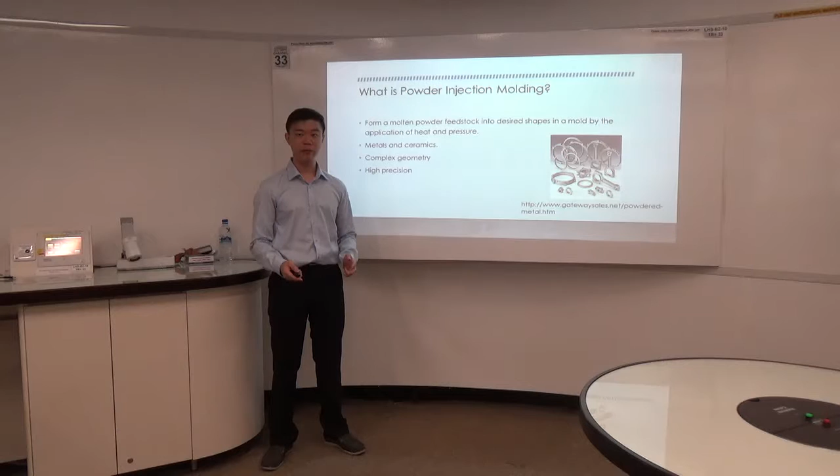My name is Kang, and my topic today is polymeric binder for transparent ceramic powder injection molding. Now, what is powder injection molding? It is actually the process in which we form a molten powder feedstock into the desired shape inside the mold via the application of heat and pressure. This technology is compatible with ceramic and metal powder, and it is widely considered an effective way of forming parts with complex geometry with high precision.

Now, there are 4 steps for powder injection molding, which are mixing, molding, debinding, and sintering. The first step here is mixing. It is actually the process in which we mix the transparent ceramic or metal powder together with the polymeric binder in order to achieve a feedstock. To make sure this feedstock is homogeneous, a twin screw extruder or a planetary mixer will be used.

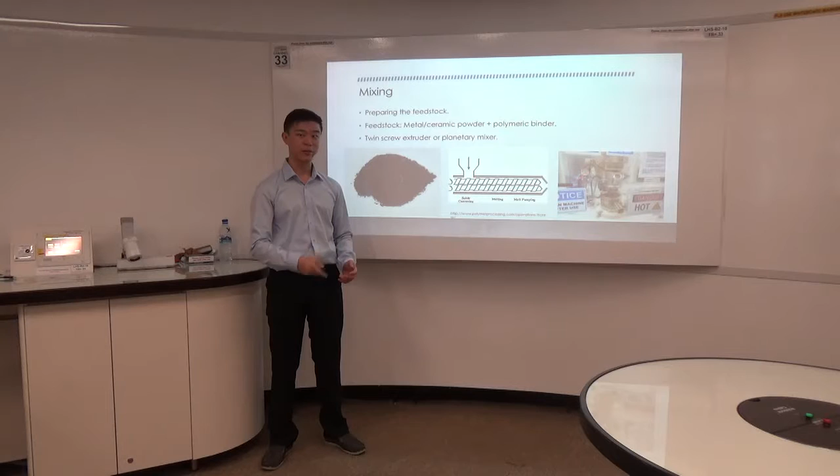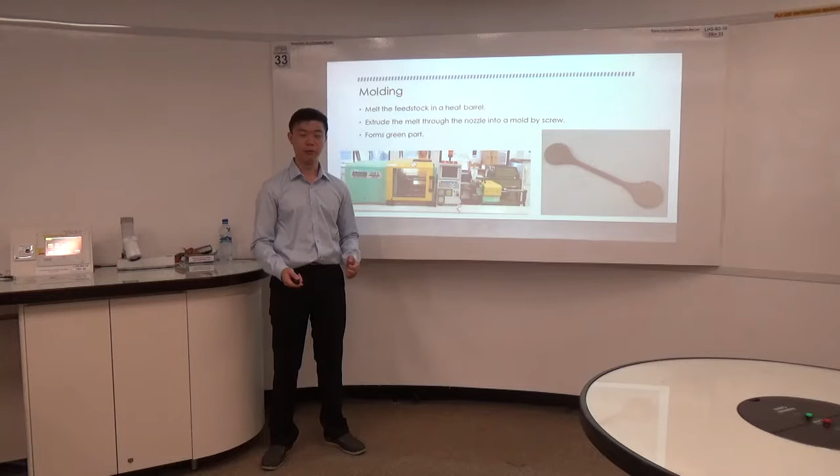The second step here is molding. During this step, the feedstock will be poured inside the heated barrel, and after it melts, the screw inside the heated barrel would spin and generate enough pressure to force the molten feedstock out of the nozzle into the mold. When the mold opens, we will acquire the green part.

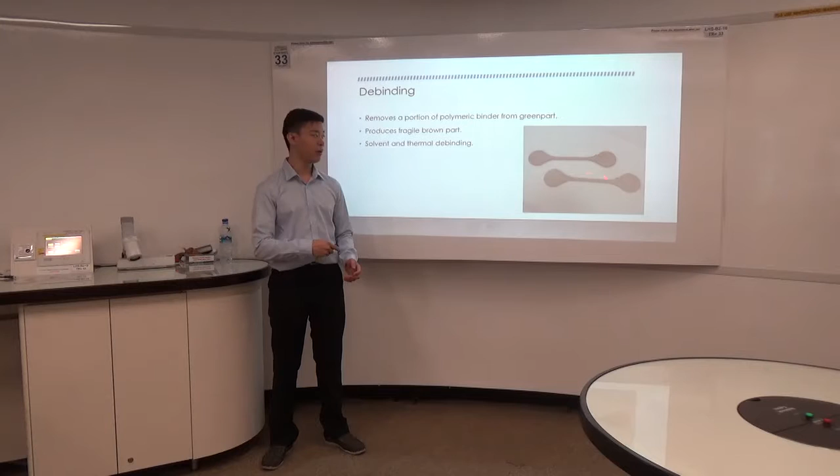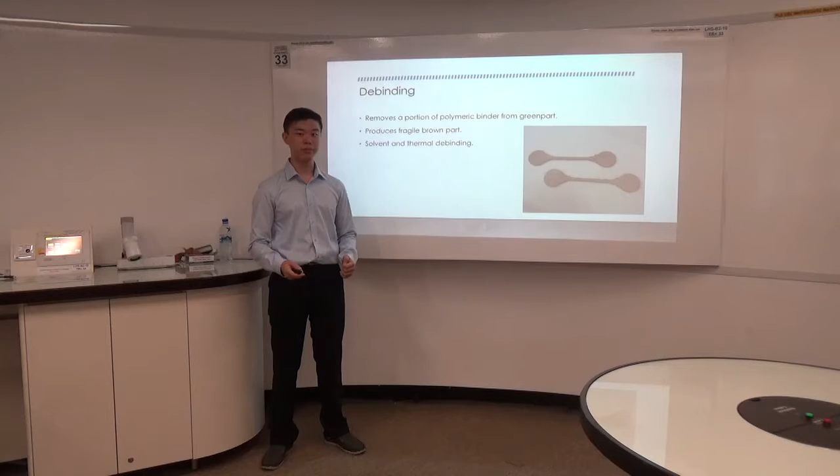The third step here is debinding. This is the step in which we remove a portion of the polymeric binder from the green part and form the brown part. Since some of the polymeric binder has been removed, this brown part is very fragile and must be handled with care. There are 2 types of debinding process, which are solvent debinding and thermal debinding. Which of these processes will be used depends on the composition of the polymeric binder.

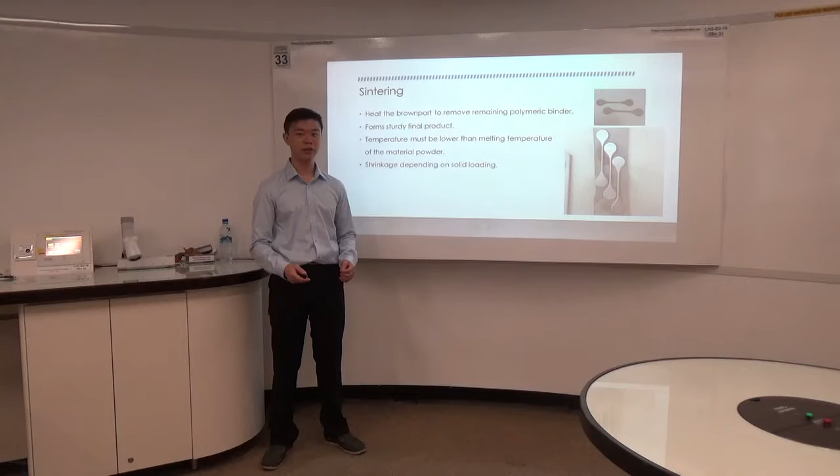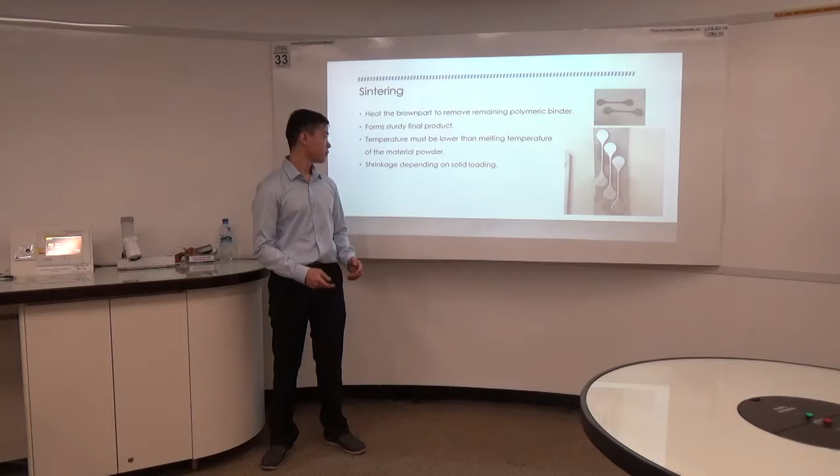The final step here is sintering. During this step, the brown part will be heated at a very high temperature in order to burn away all of the remaining polymeric binder to acquire a sturdy final product. This final product is very sturdy compared to the brown part. Although this temperature is very high, it is always lower than the melting temperature of the material powder. Since all of the polymeric binder has been removed, this final product is actually smaller than the green part, and the degree of shrinkage depends on the solid loading.

Now, what is a polymeric binder system? It is actually a mixture of a lot of polymers. In the solid state, it can stick and hold the material powder together, and in the molten state, it can carry the powder around and act as a lubricant. The composition of the polymeric binder directly affects the viscosity and strength. The components of the polymeric binder system can be divided into primary binder, backbone polymer, and coupling agent.

Depending on what kind of primary binder we use, the polymeric binder system can be divided into 2, which are wax-based binder system and catalytic-based binder system. Generally, the wax-based binder system will have a lower viscosity and mechanical strength compared to the catalytic-based binder system.

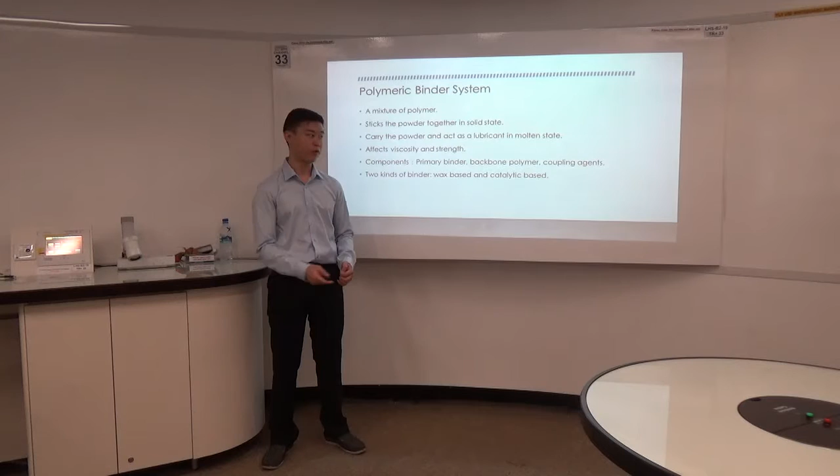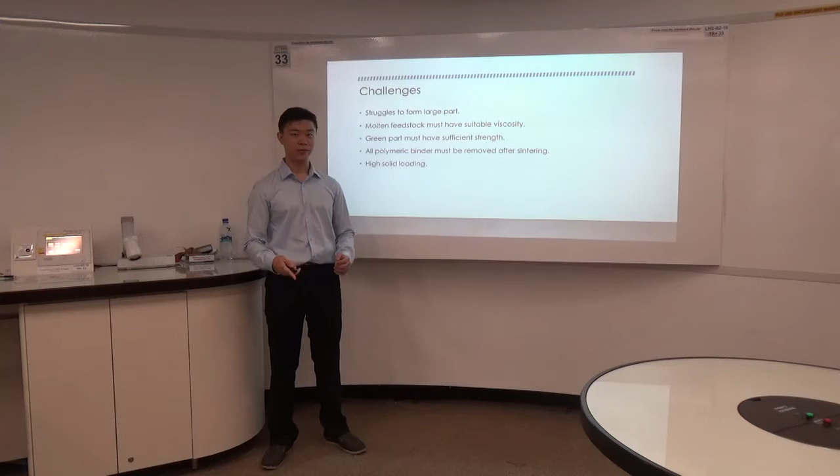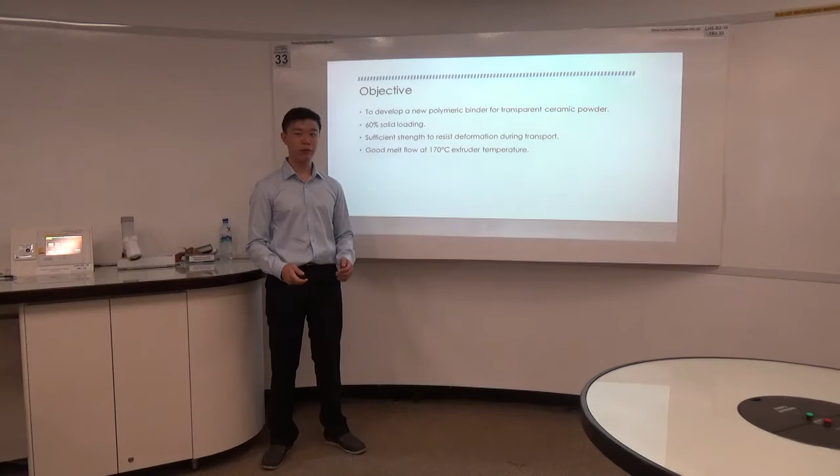Now, the objective for this project is to develop a new polymeric binder for transparent ceramic powder, and the solid loading must be 60% when it is mixed with alumina powder. This feedstock must have sufficient strength to resist deformation during transport, and it must have a good melt flow at 170° extruder temperature. The feedstock must be compatible with a wide mold temperature range, and it must have 0 residue binder after sintering.

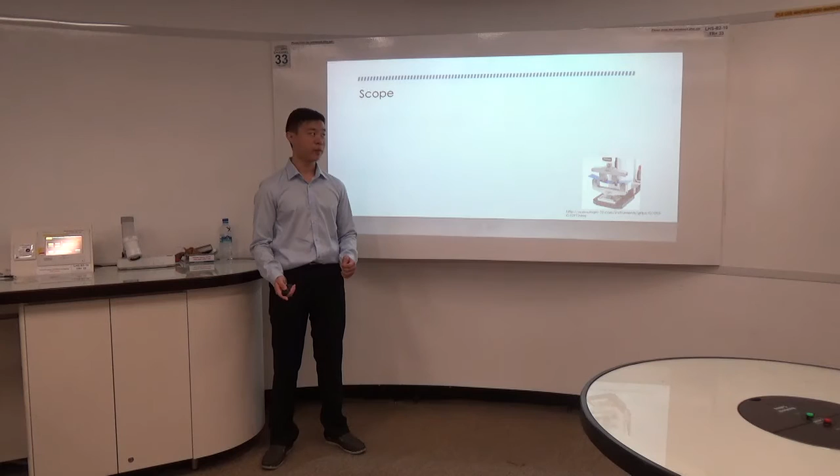Now, the machines we will be using for the processing are the Arburg injection molding machine, planetary mixer, twin screw extruder, debinding basin, and furnace. The characterization machines we'll be using here are the four-point bending tester, this one, and finally the tensile tester.

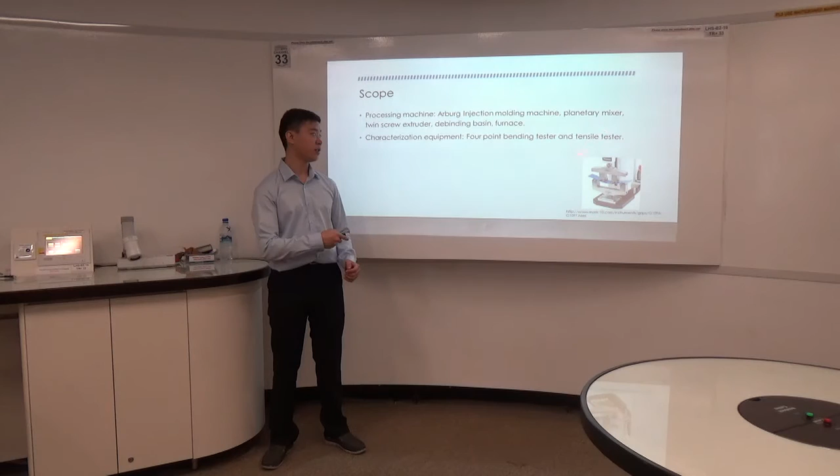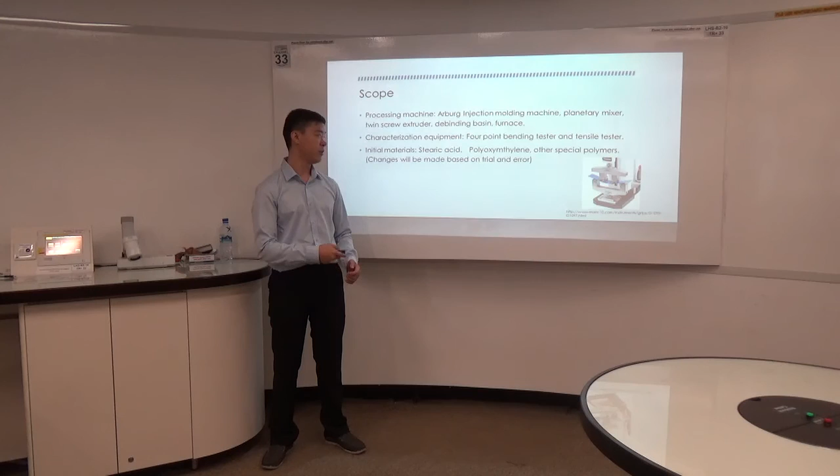The initial materials we chose here are stearic acid, polyoxymethylene, and other special polymers. Changes and replacements to the materials and composition will be based on trial and error. Now, this is the aim of my presentation.